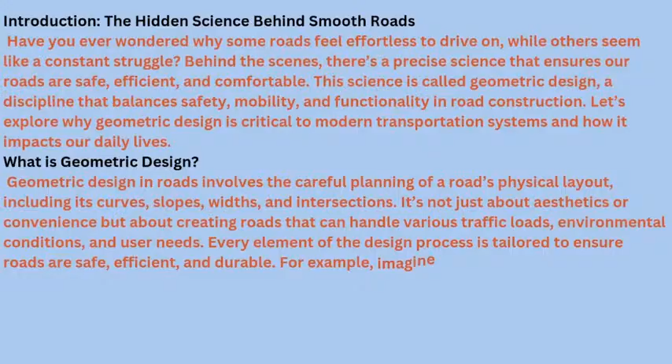For example, imagine a winding mountain road. If its curves are too sharp or its slopes too steep, the risk of accidents increases dramatically. Geometric design addresses such challenges by optimizing the road's alignment, grade, and other factors to suit the terrain and traffic conditions.

Key elements of geometric design. First, alignment: alignment refers to the road's horizontal and vertical layout. Horizontal alignment involves planning curves and straight sections, while vertical alignment focuses on elevations and gradients. Proper alignment ensures vehicles can travel smoothly and safely at recommended speeds, reducing risks such as rollover accidents or loss of control. Second, cross-section: the cross-section of a road includes its lane widths, shoulder widths, and slope.

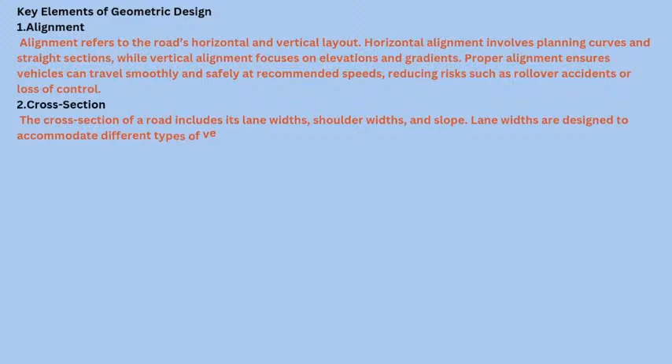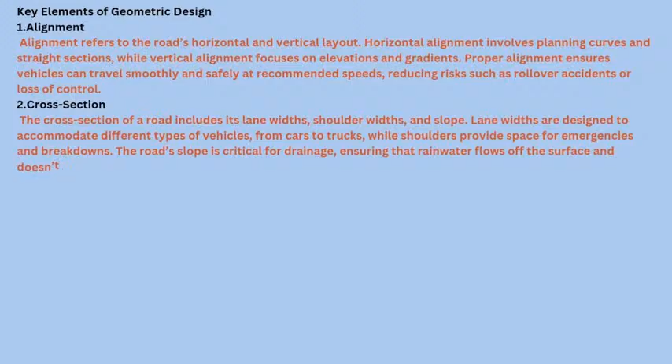Lane widths are designed to accommodate different types of vehicles, from cars to trucks, while shoulders provide space for emergencies and breakdowns. The road slope is critical for drainage, ensuring that rainwater flows off the surface and doesn't pool, which could lead to hydroplaning.

Third, sight distance: sight distance is the length of road visible to a driver at any given time. It's a crucial factor in preventing accidents, as it allows drivers enough time to react to obstacles or changes in traffic flow. Poor sight distances, especially on curves or at intersections, are often linked to collisions.

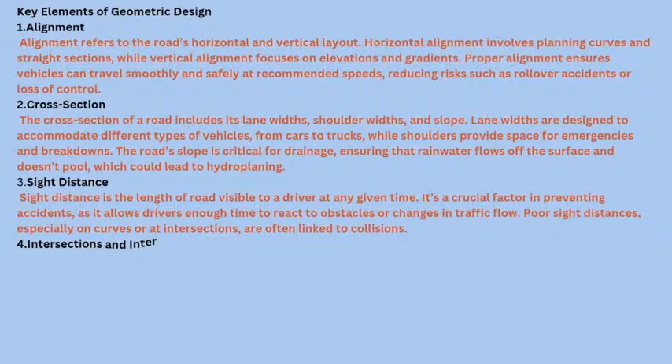Fourth, intersections and interchanges: intersections are among the most accident-prone areas of any road network. Designing intersections involves careful consideration of factors like visibility, turning radii, and traffic control measures such as signals and signage. Well-designed intersections reduce confusion and improve traffic flow, enhancing overall safety and efficiency.

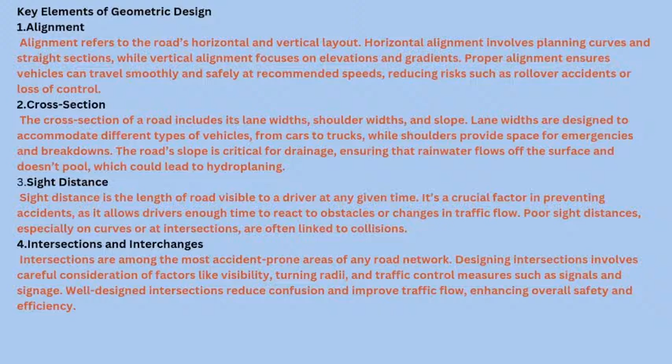The benefits of effective geometric design.

Enhanced safety: well-designed roads save lives. By minimizing sharp curves, blind spots, and poorly marked intersections, geometric design significantly reduces the likelihood of accidents. Research consistently shows that better road geometry leads to fewer collisions and injuries.

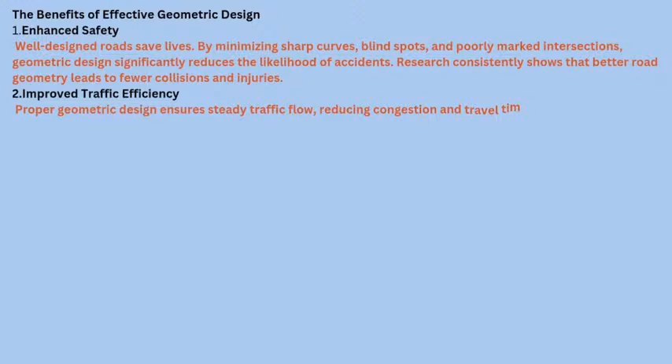Improved traffic efficiency: proper geometric design ensures steady traffic flow, reducing congestion and travel times. For urban areas, where delays can cost millions in lost productivity, efficient road layouts are essential.

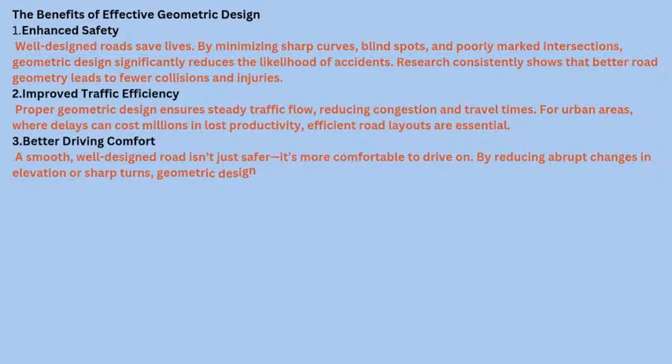Better driving comfort: a smooth, well-designed road isn't just safer, it's more comfortable to drive on. By reducing abrupt changes in elevation or sharp turns, geometric design ensures a pleasant driving experience.

Environmental and economic considerations. Environmental sustainability: geometric design also takes environmental factors into account. Roads are often planned to work with the natural terrain, minimizing the need for extensive earthworks. This approach not only reduces construction costs but also preserves local ecosystems.

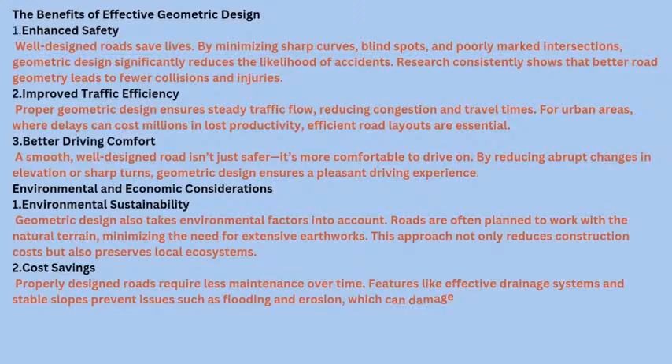Cost savings: properly designed roads require less maintenance over time. Features like effective drainage systems and stable slopes prevent issues such as flooding and erosion, which can damage infrastructure and lead to costly repairs.

The future of geometric design. With advances in technology, geometric design is entering a new era. The rise of autonomous vehicles and smart cities is driving innovations in road planning. Future roads will be equipped with features like embedded sensors and communication systems that interact with automated vehicles. These roads will not only be safer and more efficient but also sustainable and adaptive to changing needs. For instance, highways designed for autonomous vehicles will have smoother alignments, fewer abrupt transitions, and features to facilitate vehicle-to-infrastructure communication.

This will revolutionize how we think about road design and transportation.

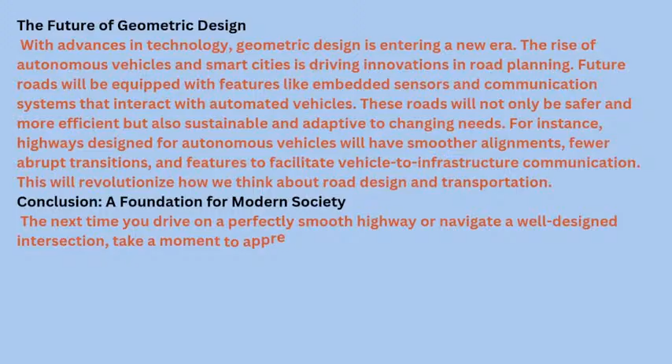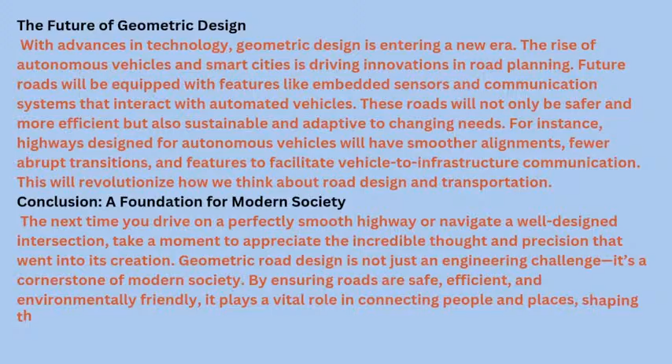Conclusion: a foundation for modern society. The next time you drive on a perfectly smooth highway or navigate a well-designed intersection, take a moment to appreciate the incredible thought and precision that went into its creation. Geometric road design is not just an engineering challenge, it's a cornerstone of modern society. By ensuring roads are safe, efficient, and environmentally friendly, it plays a vital role in connecting people and places, shaping the way we live and travel.

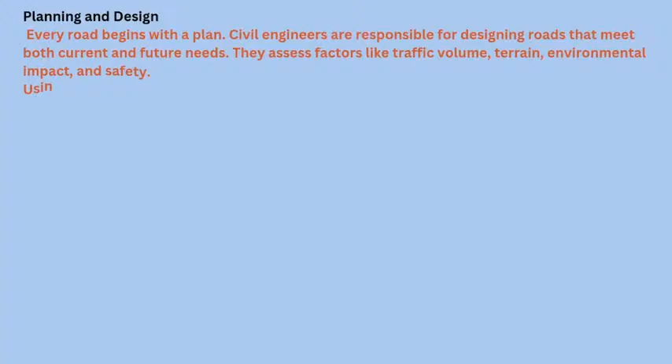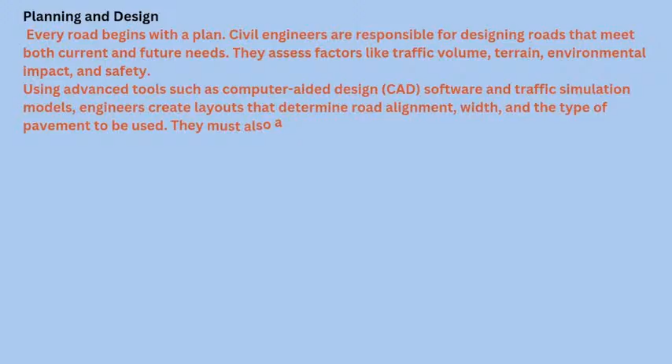Planning and design: every road begins with a plan. Civil engineers are responsible for designing roads that meet both current and future needs. They assess factors like traffic volume, terrain, environmental impact, and safety. Using advanced tools such as computer-aided design (CAD) software and traffic simulation models, engineers create layouts that determine road alignment, width, and the type of pavement to be used. They must also account for gradients, curves, and intersections to ensure smooth and safe traffic flow.

Another critical part of the design phase is drainage planning. Engineers ensure that roads are equipped to handle water runoff, preventing flooding and erosion.

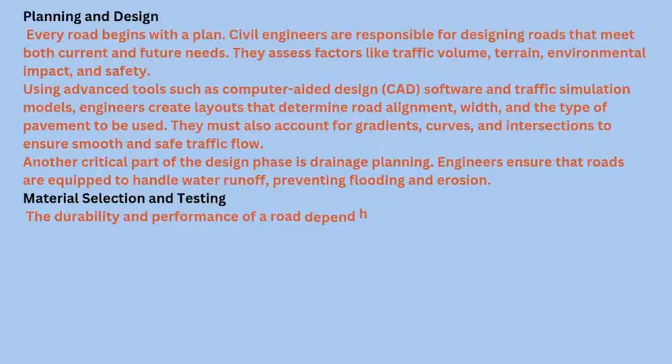Material selection and testing: the durability and performance of a road depend heavily on the materials used. Civil engineers select and test materials such as asphalt, concrete, aggregates, and soil. They ensure these materials meet specific standards for strength, flexibility, and longevity. For example, asphalt might be chosen for its flexibility in handling temperature changes, while concrete may be selected for areas with heavy traffic due to its strength.

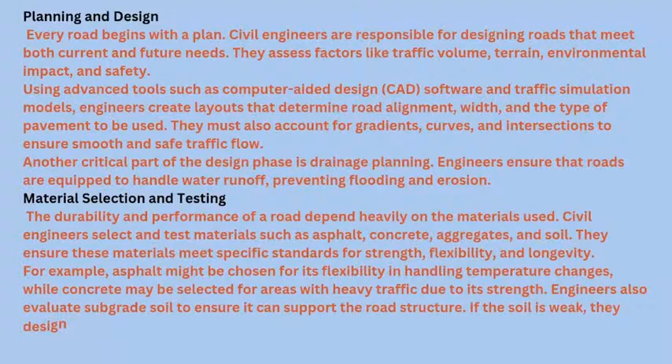Engineers also evaluate subgrade soil to ensure it can support the road structure. If the soil is weak, they design methods to stabilize it.

Construction supervision: once the design is finalized, civil engineers oversee the construction process. They work closely with contractors and labor teams to ensure the project adheres to specifications and timelines. This includes supervising tasks like excavation, grading, laying the base and subbase layers, and finally, paving. Engineers also ensure the proper installation of road features such as curbs, signage, and guardrails.

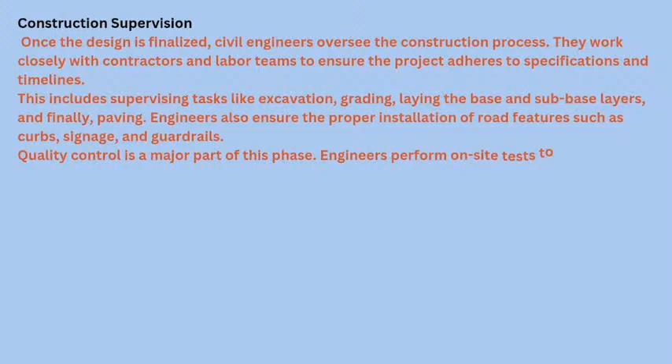Quality control is a major part of this phase. Engineers perform on-site tests to check the compaction of soil, the thickness of asphalt layers, and the strength of concrete slabs. Their attention to detail ensures that the road will withstand traffic and environmental conditions.

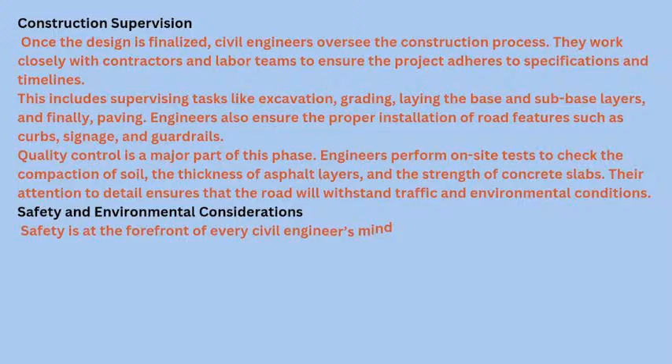Safety and environmental considerations: safety is at the forefront of every civil engineer's mind during road construction. Engineers design features like lighting, signage, and barriers to protect drivers and pedestrians. They also plan for emergency access routes and ensure compliance with safety standards.

Environmental impact is another key consideration. Civil engineers work to minimize disruption to ecosystems by designing wildlife crossings, reducing noise pollution, and incorporating sustainable practices like recycling construction materials.

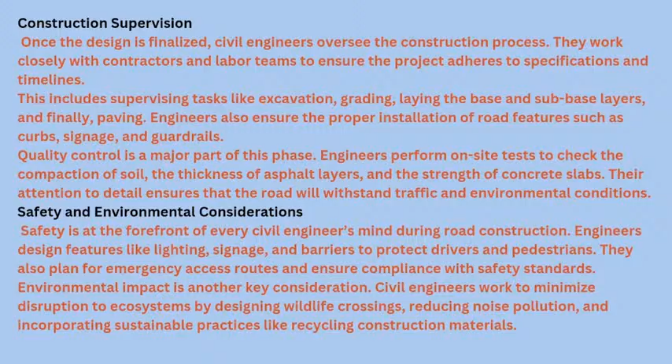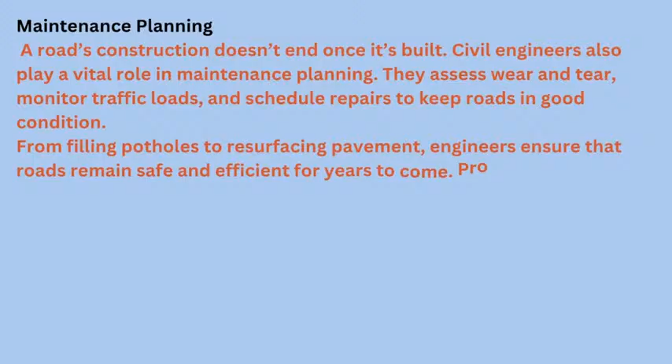Maintenance planning. A road's construction doesn't end once it's built. Civil engineers also play a vital role in maintenance planning. They assess wear and tear, monitor traffic loads, and schedule repairs to keep roads in good condition. From filling potholes to resurfacing pavement, engineers ensure that roads remain safe and efficient for years to come. Proactive maintenance reduces long-term costs and prevents major failures.

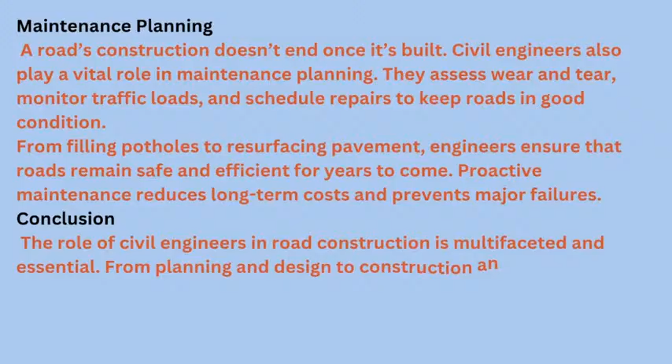Conclusion. The role of civil engineers in road construction is multifaceted and essential. From planning and design to construction and maintenance, they ensure that our roads are safe, durable, and efficient. Their expertise shapes the infrastructure we rely on every day.

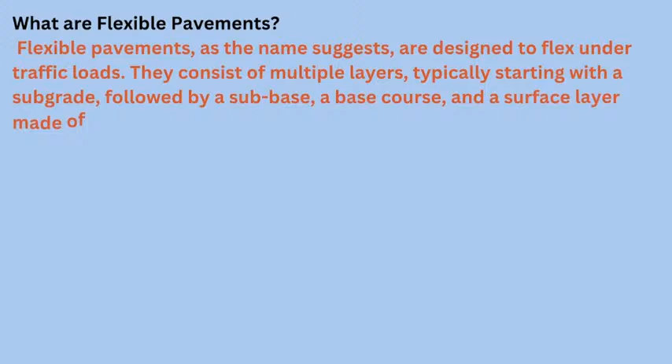Let's break it down. What are flexible pavements? Flexible pavements, as the name suggests, are designed to flex under traffic loads. They consist of multiple layers, typically starting with a subgrade, followed by a subbase, a base course, and a surface layer made of asphalt. The primary characteristic of flexible pavements is their ability to distribute loads through a layered structure.

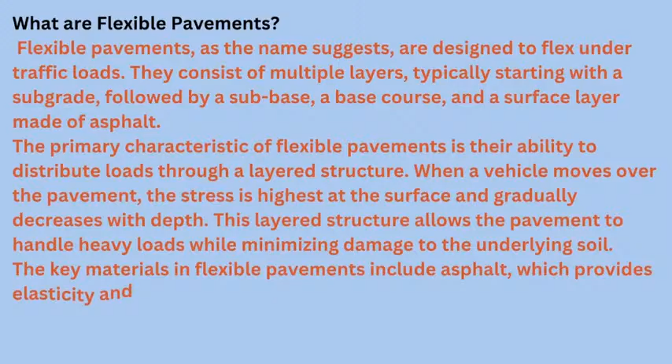When a vehicle moves over the pavement, the stress is highest at the surface and gradually decreases with depth. This layered structure allows the pavement to handle heavy loads while minimizing damage to the underlying soil. The key materials in flexible pavements include asphalt, which provides elasticity and resilience, and aggregates for strength and stability. One advantage of flexible pavements is their ability to adapt to minor settlements or deformations in the subgrade without cracking.

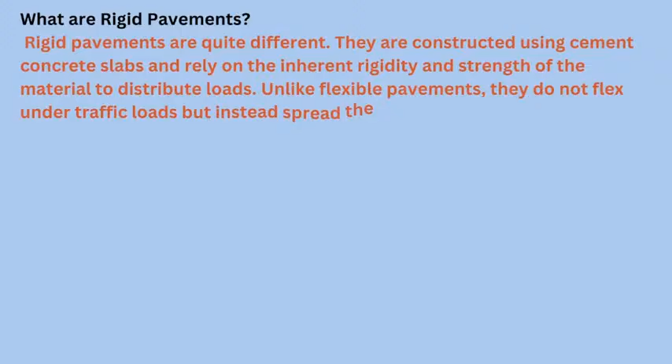What are rigid pavements? Rigid pavements are quite different. They are constructed using cement concrete slabs and rely on the inherent rigidity and strength of the material to distribute loads. Unlike flexible pavements, they do not flex under traffic loads, but instead spread the pressure over a larger area. The design of rigid pavements typically includes a concrete slab supported by a base or subbase layer. These pavements are known for their durability and long service life.

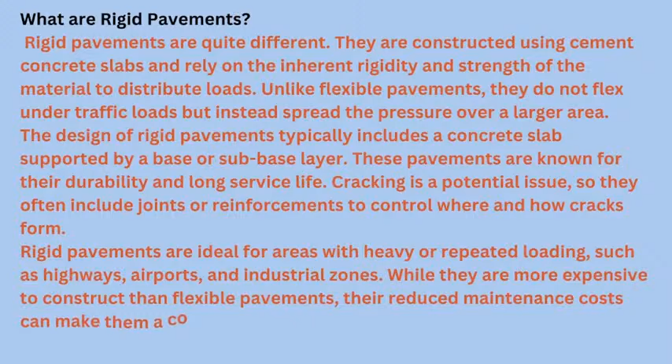Cracking is a potential issue, so they often include joints or reinforcements to control where and how cracks form. Rigid pavements are ideal for areas with heavy or repeated loading, such as highways, airports, and industrial zones. While they are more expensive to construct than flexible pavements, their reduced maintenance costs can make them a cost-effective option over time.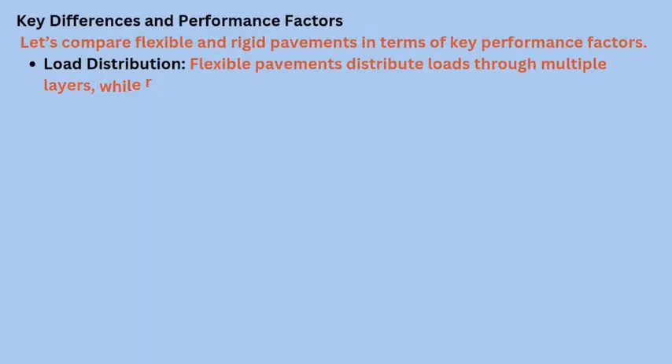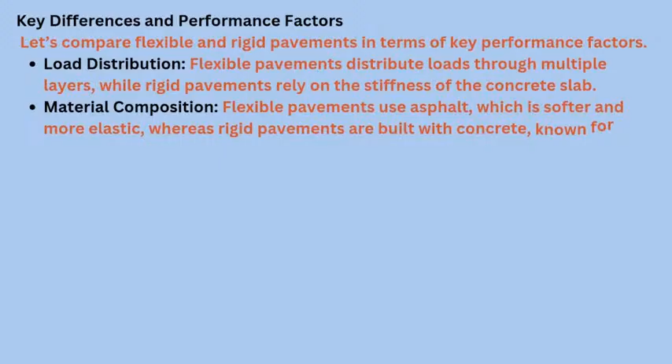Key differences and performance factors. Let's compare flexible and rigid pavements in terms of key performance factors. Load distribution: flexible pavements distribute loads through multiple layers, while rigid pavements rely on the stiffness of the concrete slab. Material composition: flexible pavements use asphalt, which is softer and more elastic, whereas rigid pavements are built with concrete, known for its compressive strength.

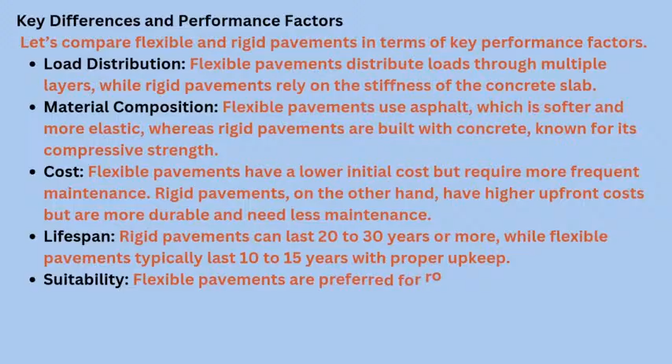Cost: flexible pavements have a lower initial cost, but require more frequent maintenance. Rigid pavements, on the other hand, have higher upfront costs, but are more durable and need less maintenance. Lifespan: rigid pavements can last 20 to 30 years or more, while flexible pavements typically last 10 to 15 years with proper upkeep. Suitability: flexible pavements are preferred for roads with moderate traffic and regions with significant temperature variations. Rigid pavements are best for high-traffic areas and locations with stable climatic conditions.

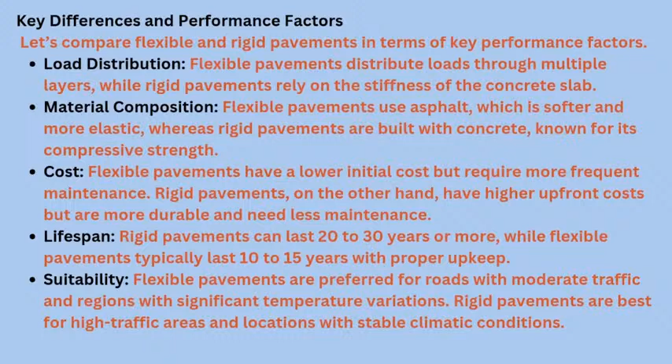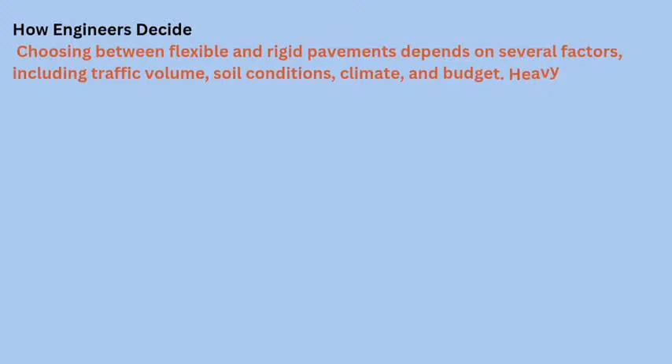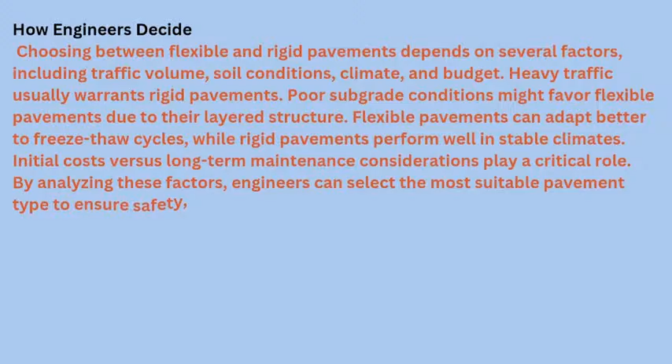How engineers decide. Choosing between flexible and rigid pavements depends on several factors, including traffic volume, soil conditions, climate, and budget. Heavy traffic usually warrants rigid pavements. Poor subgrade conditions might favor flexible pavements due to their layered structure. Flexible pavements can adapt better to freeze-thaw cycles, while rigid pavements perform well in stable climates. Initial costs versus long-term maintenance considerations play a critical role. By analyzing these factors, engineers can select the most suitable pavement type to ensure safety, durability, and cost-effectiveness.

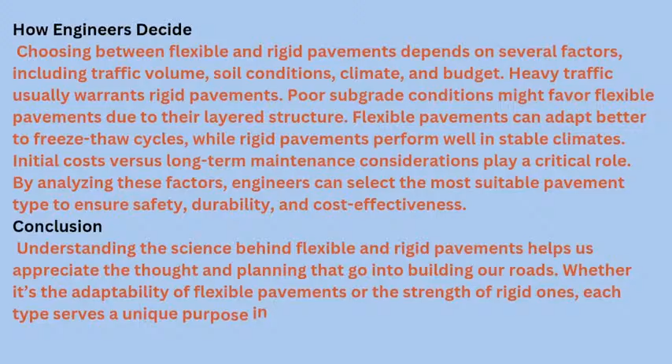Conclusion. Understanding the science behind flexible and rigid pavements helps us appreciate the thought and planning that go into building our roads. Whether it's the adaptability of flexible pavements or the strength of rigid ones, each type serves a unique purpose in modern infrastructure.

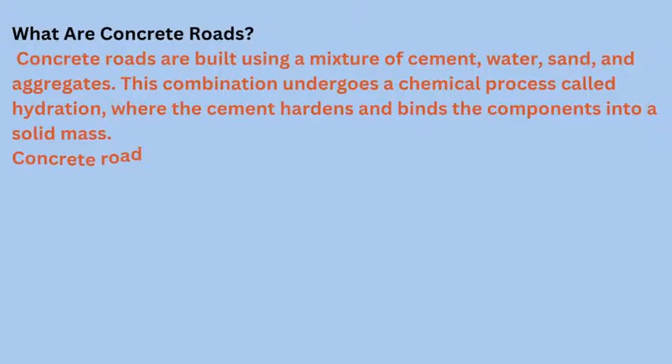This combination undergoes a chemical process called hydration, where the cement hardens and binds the components into a solid mass. Concrete roads are often used in areas requiring long-lasting infrastructure, such as highways, industrial zones, and urban arterials. Unlike asphalt, which is more flexible, concrete is a rigid material designed to distribute loads evenly over the subgrade.

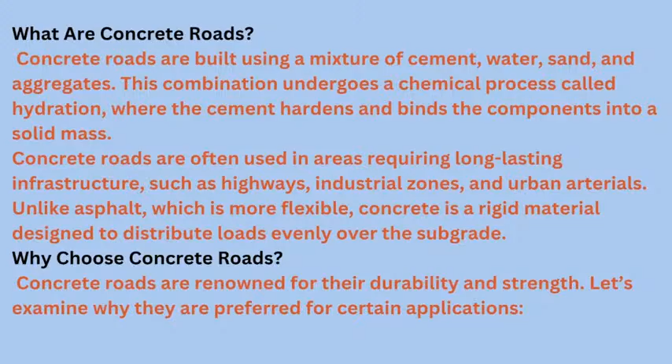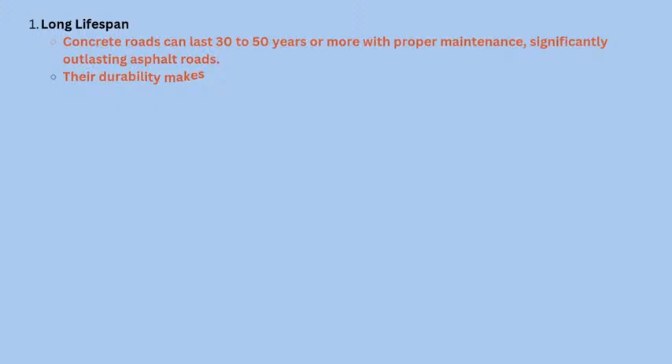Why choose concrete roads? Concrete roads are renowned for their durability and strength. Let's examine why they are preferred for certain applications. First, long lifespan: concrete roads can last 30 to 50 years or more with proper maintenance, significantly outlasting asphalt roads. Their durability makes them ideal for high-traffic areas and heavy-duty applications.

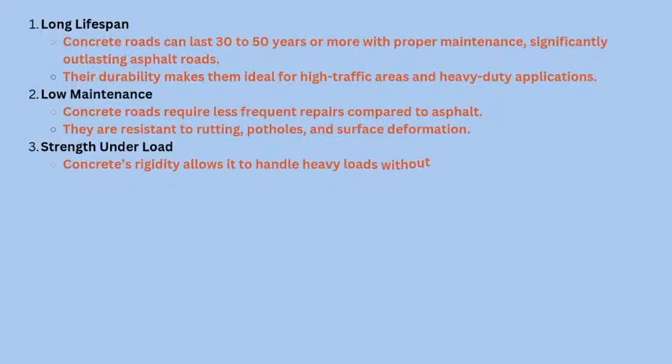Second, low maintenance. Concrete roads require less frequent repairs compared to asphalt. They are resistant to rutting, potholes, and surface deformation. Third, strength under load: concrete's rigidity allows it to handle heavy loads without significant deformation. It's especially useful in industrial zones with heavy truck traffic.

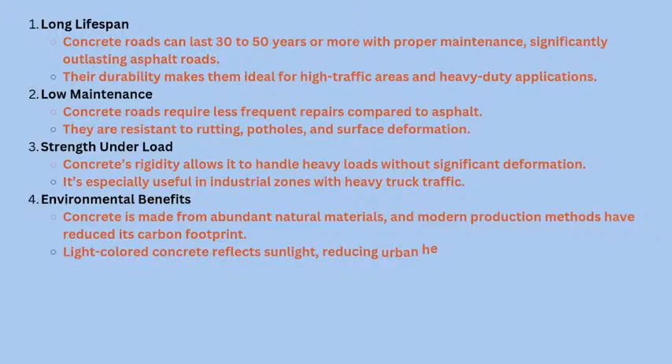Fourth, environmental benefits. Concrete is made from abundant natural materials, and modern production methods have reduced its carbon footprint. Light-colored concrete reflects sunlight, reducing urban heat islands and lowering cooling costs.

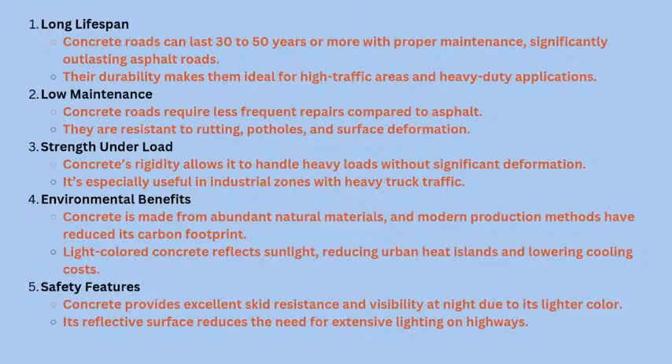Fifth, safety features. Concrete provides excellent skid resistance and visibility at night due to its lighter color. Its reflective surface reduces the need for extensive lighting on highways.

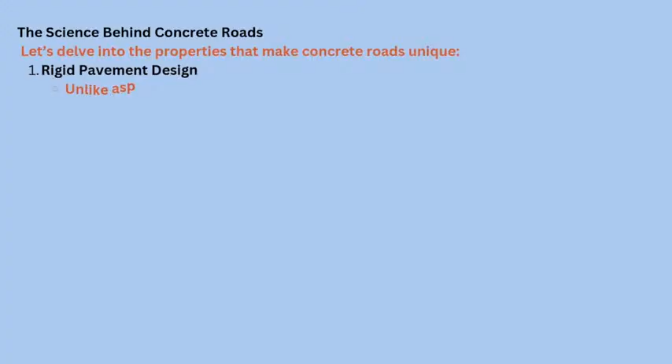The science behind concrete roads. Let's delve into the properties that make concrete roads unique. First, rigid pavement design: unlike asphalt's flexible structure, concrete roads are built as rigid pavements. The load is distributed over a wide area, reducing stress on the subgrade.

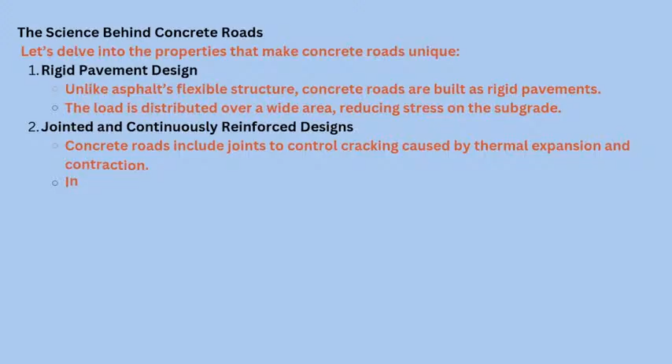Second, jointed and continuously reinforced designs. Concrete roads include joints to control cracking caused by thermal expansion and contraction. In some cases, steel reinforcement is used for added durability, creating continuously reinforced concrete pavements, CRCP.

Third, high compressive strength. Concrete's ability to withstand heavy loads under compression is a key factor in its widespread use for roads. Fourth, thermal behavior: concrete expands and contracts with temperature changes, requiring careful design to prevent cracking.

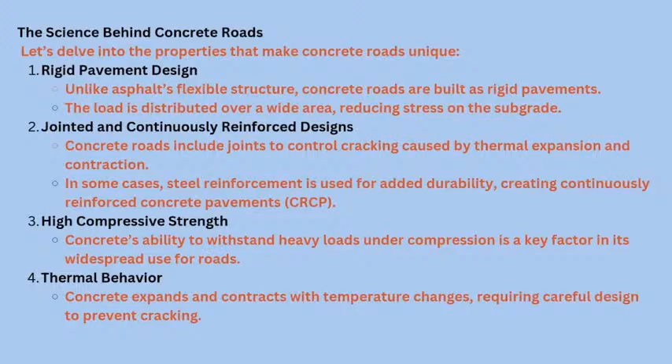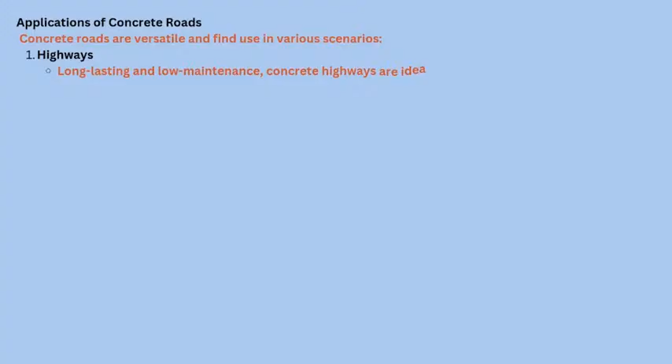Applications of concrete roads. Concrete roads are versatile and find use in various scenarios. First, highways: long-lasting and low maintenance, concrete highways are ideal for intercity and cross-country travel.

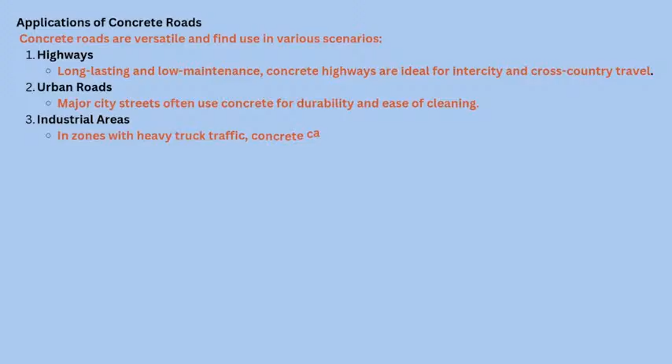Second, urban roads: major city streets often use concrete for durability and ease of cleaning. Third, industrial areas: in zones with heavy truck traffic, concrete can withstand the stress without significant wear. Fourth, airport runways: concrete's strength makes it a preferred material for runways, where aircraft impose substantial loads.

Challenges of concrete roads. While concrete roads offer numerous advantages, they also come with challenges. High initial cost: the upfront cost of concrete roads is significantly higher than asphalt. Longer construction time: concrete roads require more time to set and cure, leading to longer construction timelines. Limited flexibility: unlike asphalt, concrete does not handle subgrade movement well, which can lead to cracking in certain conditions. Advancements in construction techniques and materials are addressing many of these challenges, making concrete roads more efficient and accessible.

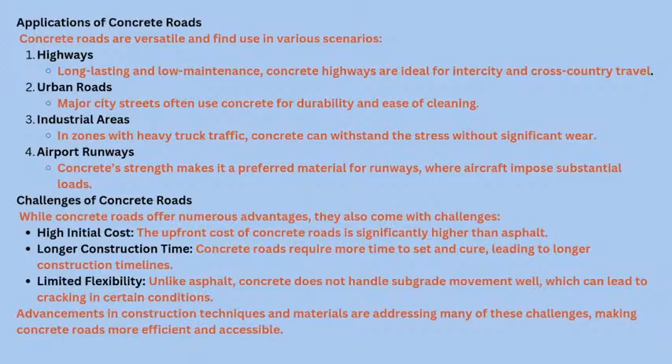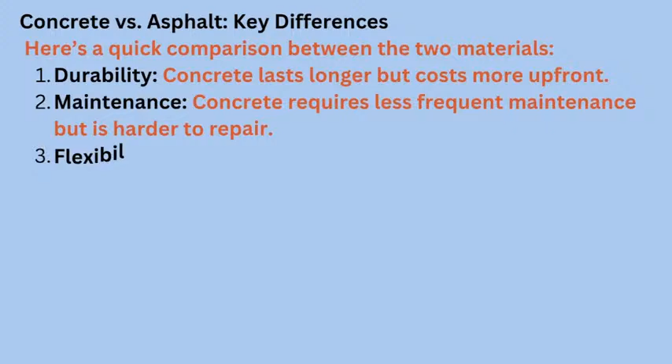Concrete versus asphalt: key differences. Here's a quick comparison between the two materials. First, durability: concrete lasts longer but costs more upfront. Second, maintenance: concrete requires less frequent maintenance, but is harder to repair. Third, flexibility: asphalt is better for areas with frequent freeze-thaw cycles, while concrete thrives in stable conditions.

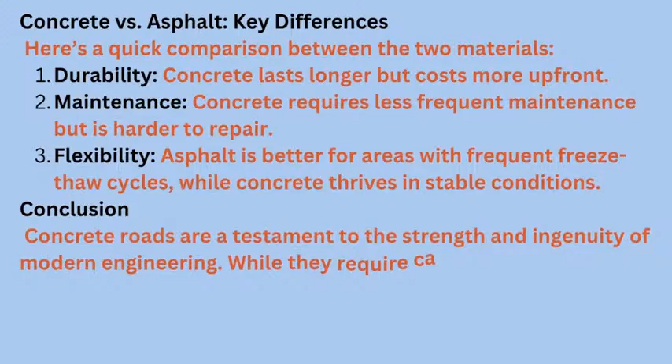Conclusion. Concrete roads are a testament to the strength and ingenuity of modern engineering. While they require careful planning and investment, their long-term benefits make them an invaluable part of transportation infrastructure.

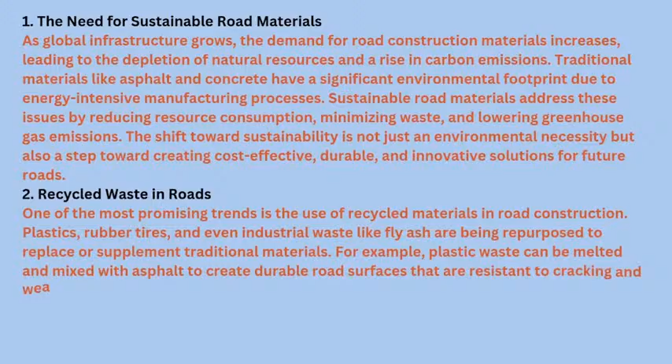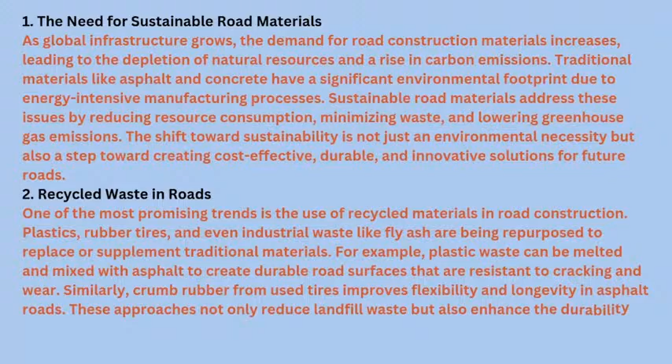Recycled waste in roads. One of the most promising trends is the use of recycled materials in road construction. Plastics, rubber tires, and even industrial waste like fly ash are being repurposed to replace or supplement traditional materials. For example, plastic waste can be melted and mixed with asphalt to create durable road surfaces that are resistant to cracking and wear. Similarly, crumb rubber from used tires improves flexibility and longevity in asphalt roads. These approaches not only reduce landfill waste, but also enhance the durability and performance of the roads.

Bio-based materials. Bio-based road materials, derived from renewable resources like plants and agricultural waste, are gaining attention for their sustainability and environmental benefits.

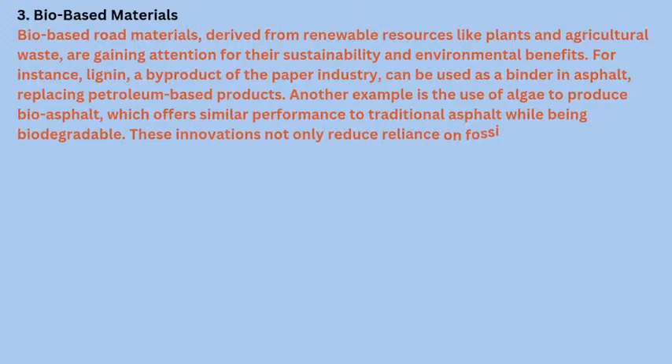For instance, lignin, a byproduct of the paper industry, can be used as a binder in asphalt, replacing petroleum-based products. Another example is the use of algae to produce bioasphalt, which offers similar performance to traditional asphalt while being biodegradable. These innovations not only reduce reliance on fossil fuels, but also promote the circular economy by repurposing waste into valuable resources.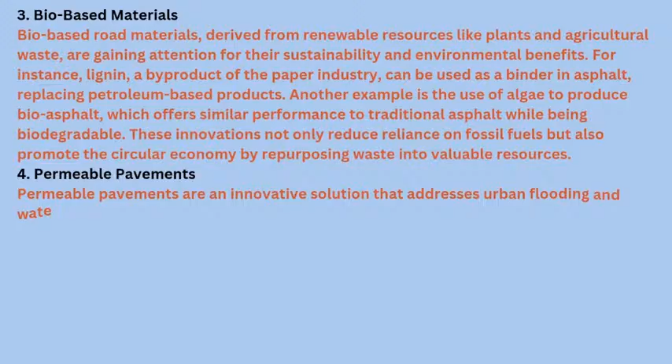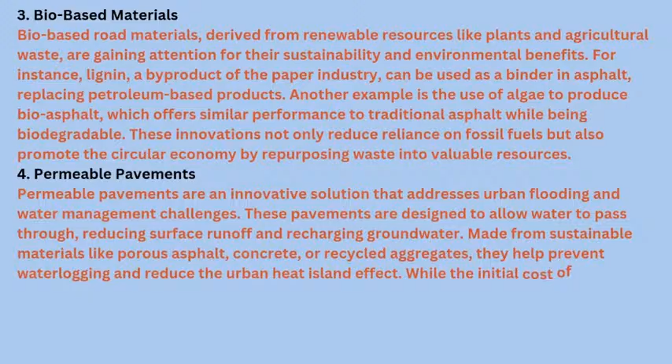Permeable pavements. Permeable pavements are an innovative solution that addresses urban flooding and water management challenges. These pavements are designed to allow water to pass through, reducing surface runoff and recharging groundwater. Made from sustainable materials like porous asphalt, concrete, or recycled aggregates, they help prevent waterlogging and reduce the urban heat island effect. While the initial cost of permeable pavements may be higher, their long-term benefits in water conservation and urban resilience make them a sustainable choice.

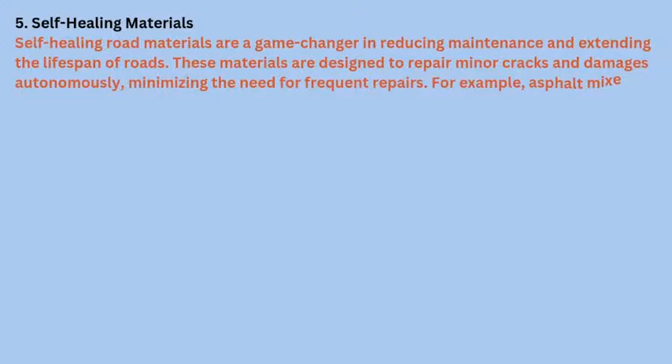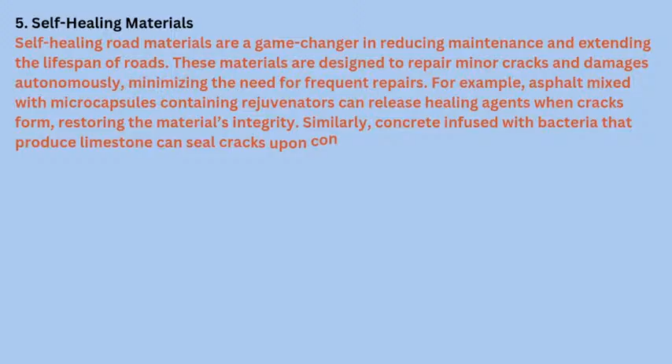Self-healing materials. Self-healing road materials are a game-changer in reducing maintenance and extending the lifespan of roads. These materials are designed to repair minor cracks and damages autonomously, minimizing the need for frequent repairs. For example, asphalt mixed with microcapsules containing rejuvenators can release healing agents when cracks form, restoring the material's integrity. Similarly, concrete infused with bacteria that produce limestone can seal cracks upon contact with water. These innovations not only save costs but also reduce the environmental impact of road maintenance.

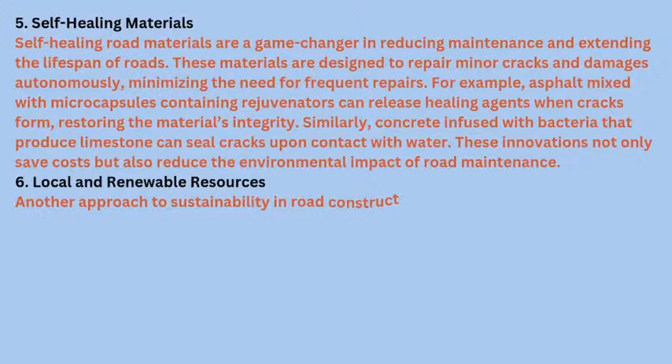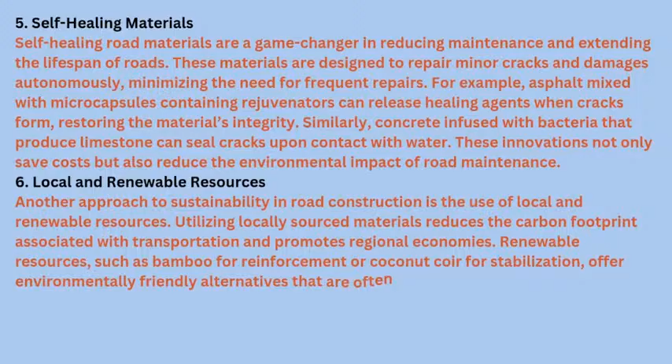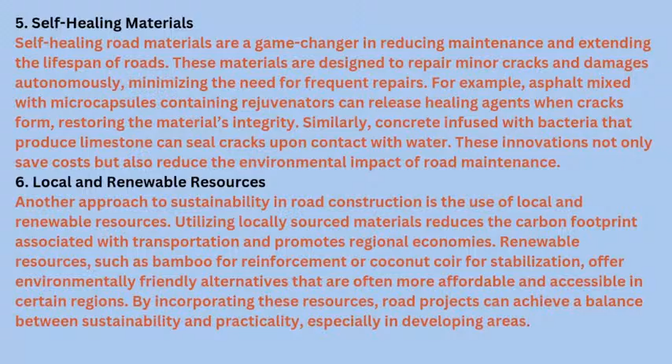Local and renewable resources. Another approach to sustainability in road construction is the use of local and renewable resources. Utilizing locally sourced materials reduces the carbon footprint associated with transportation and promotes regional economies. Renewable resources, such as bamboo for reinforcement or coconut coir for stabilization, offer environmentally friendly alternatives that are often more affordable and accessible in certain regions. By incorporating these resources, road projects can achieve a balance between sustainability and practicality, especially in developing areas.

Challenges in adoption. Despite their benefits, sustainable road materials face challenges in adoption. High initial costs, lack of standardization, and limited awareness among stakeholders can slow their implementation. Additionally, large-scale production of bio-based or recycled materials may require advancements in technology and infrastructure. Overcoming these barriers will require collaboration among governments, industries, and researchers to promote innovation and create supportive policies for sustainable road construction.

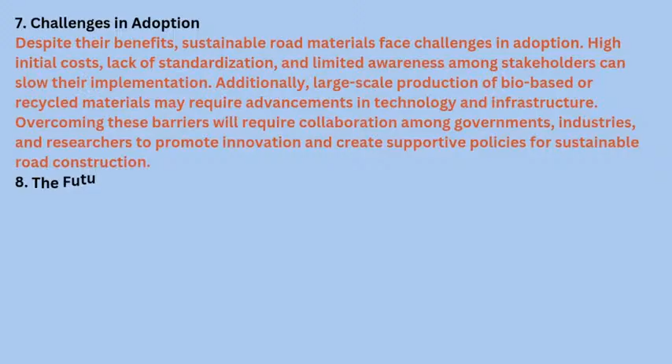The future of road materials. The future of sustainable road materials is promising, with advancements in research and technology driving new possibilities. Nanotechnology, for instance, is enabling the development of ultra-durable and energy-efficient road materials. Smart roads embedded with sensors and renewable energy systems are also becoming a reality. By investing in sustainable materials today, we can create infrastructure that is not only environmentally friendly but also resilient, adaptive, and cost-effective for generations to come.

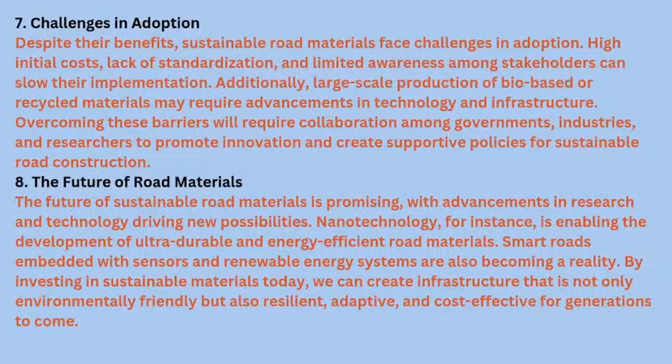Sustainable road materials represent a new era in infrastructure development, combining innovation with environmental responsibility. By embracing these materials, we can reduce our ecological footprint and build roads that align with the principles of sustainability.

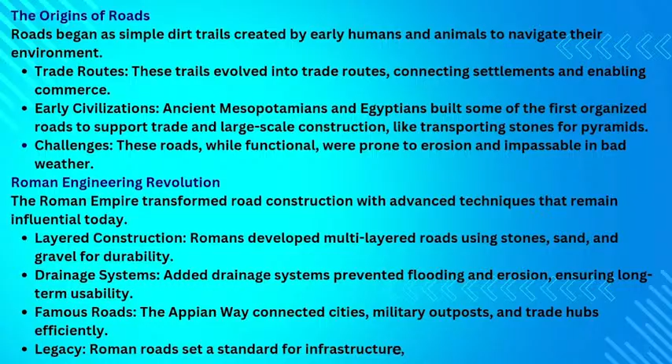Roman engineering revolution. The Roman Empire transformed road construction with advanced techniques that remain influential today. Layered construction. Romans developed multi-layered roads using stones, sand, and gravel for durability. Drainage systems. Added drainage systems prevented flooding and erosion, ensuring long-term usability. Famous roads. The Appian Way connected cities, military outposts, and trade hubs efficiently. Legacy. Roman roads set a standard for infrastructure, with some still in use today.

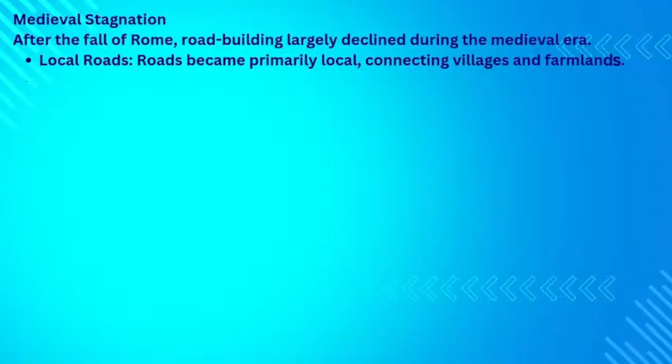Medieval stagnation. After the fall of Rome, road building largely declined during the medieval era. Local roads. Roads became primarily local, connecting villages and farmlands. Poor maintenance. Roman roads were still used but had fallen into disrepair. Impact. Limited infrastructure hindered trade and economic growth, marking a period of stagnation in transportation development.

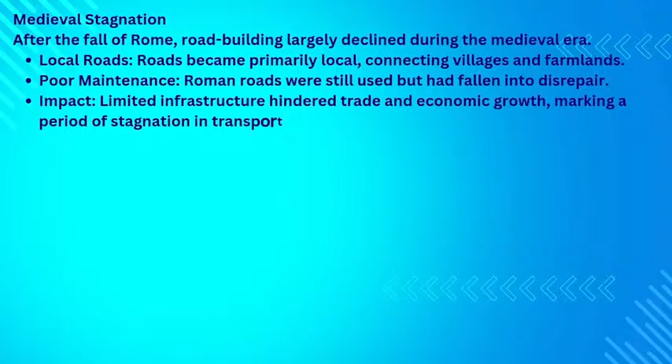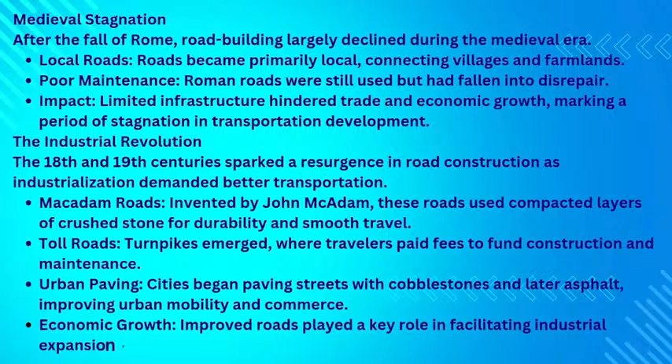The Industrial Revolution. The 18th and 19th centuries sparked a resurgence in road construction as industrialization demanded better transportation. Macadam roads. Invented by John McAdam, these roads used compacted layers of crushed stone for durability and smooth travel. Toll roads. Turnpikes emerged, where travelers paid fees to fund construction and maintenance. Urban paving. Cities began paving streets with cobblestones and later asphalt, improving urban mobility and commerce. Economic growth. Improved roads played a key role in facilitating industrial expansion and urbanization.

Modern highways and smart roads. The 20th century revolutionized road construction with highways and technological advancements.